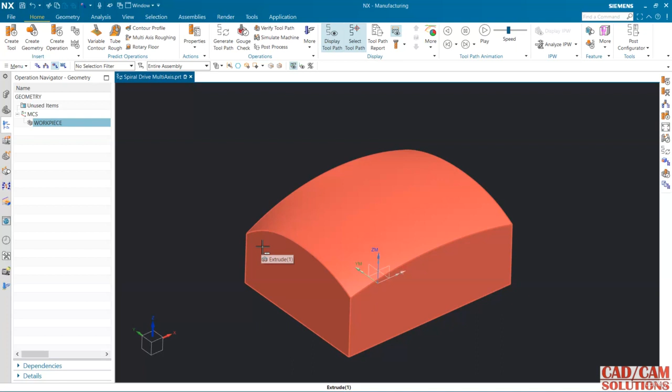Hello friends, in this lecture we will see a radial drive method in variable contour. We have already seen this in 3 axis, so this time we will work for multi-axis.

This is my geometry, so first of all define this geometry. This is the part and my blank is 0.2 offset from the part. Now tool, I'm using a ball mill tool.

Change the values as per the requirement.

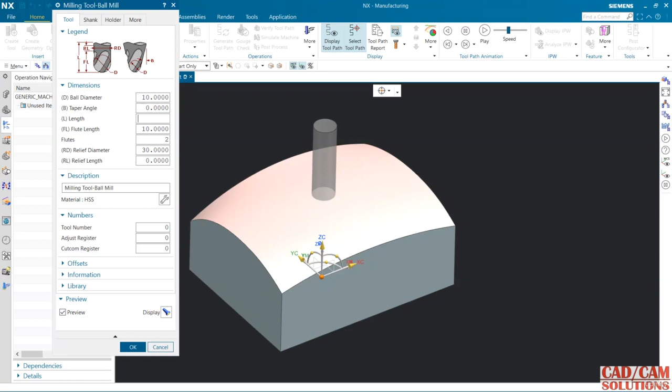I click here and I'm going to select this variable contour, and in drive I will change from surface to radial cut.

Now define drive geometry, and my drive geometry is this temporary boundary. Zigzag is my cut, step over is 1, and band is 10 on material side, and opposite side it is 5.

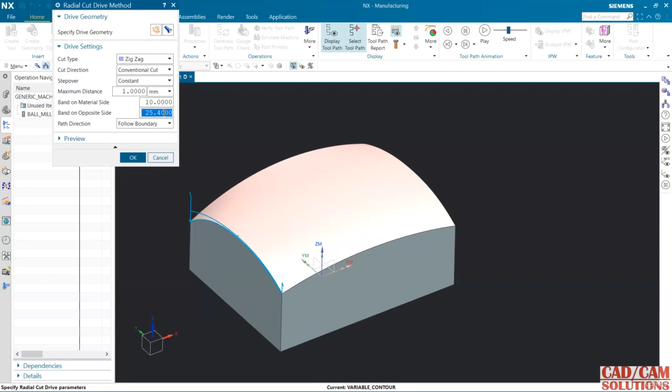I will show you preview, it is not showing you.

Now select area to cut. I want to cut this area, so select it.

And my vector is normal drive. Generate, it is not generating.

So go to this, and my projection vector is specify vector, and this is my vector. Generate it again and see, it is coming here only.

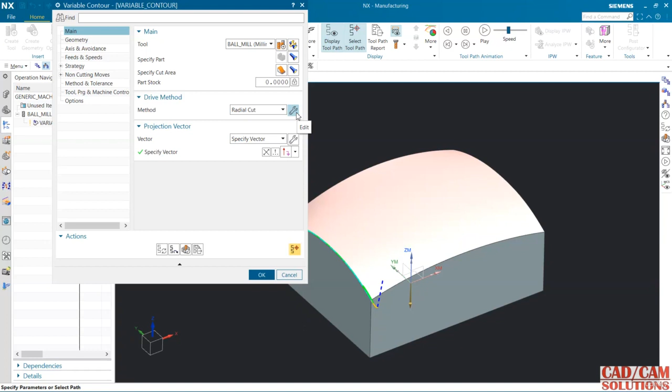So go to this radial cut, and from drive geometry my plane is automatic, and I want to define my plane.

So this time my plane is at 43, meaning above the selected surface.

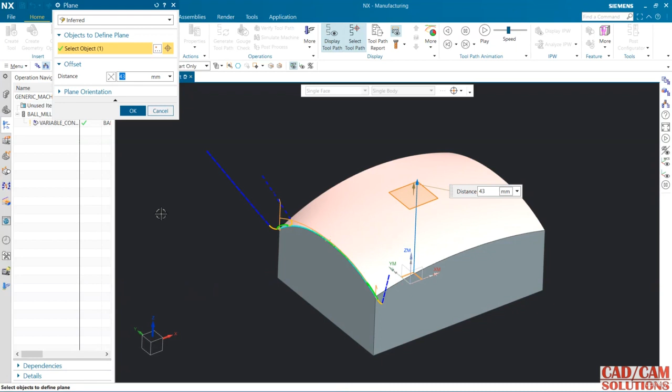Now boundary is here, and follow boundary, and let's see.

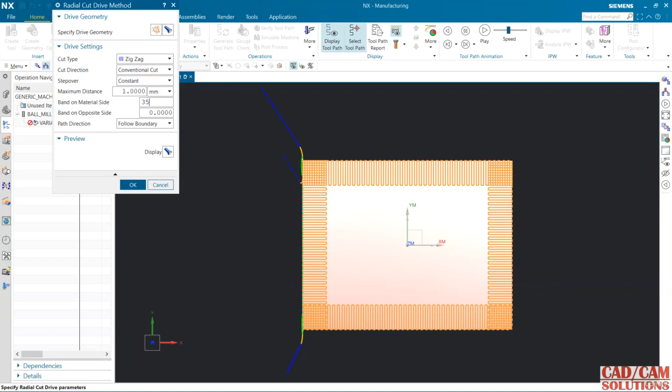5 outside, so 0, and see inside 35. See, okay, if it is.

Now I want to use this, so it is going to create like this.

And generate, and let's see the preview.

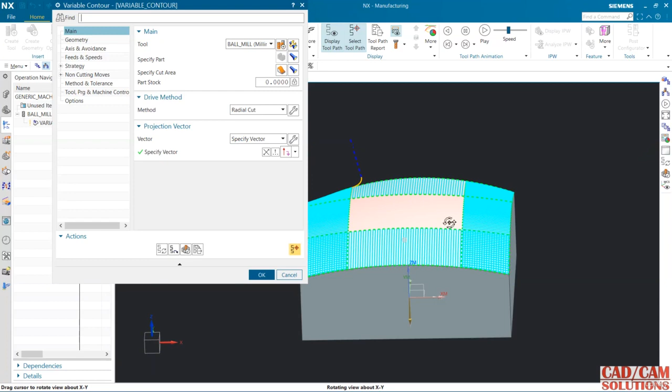It is working in multi-axis. Stop, and in 3D dynamic.

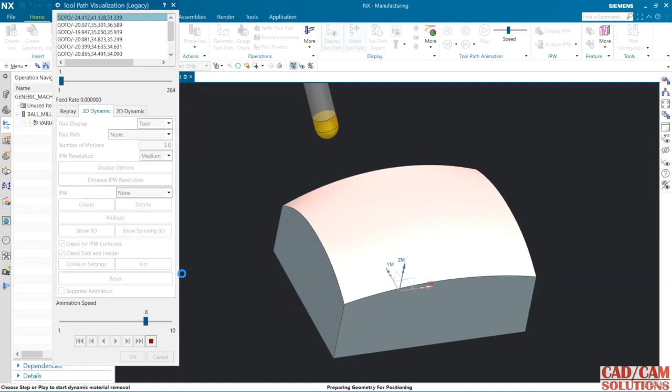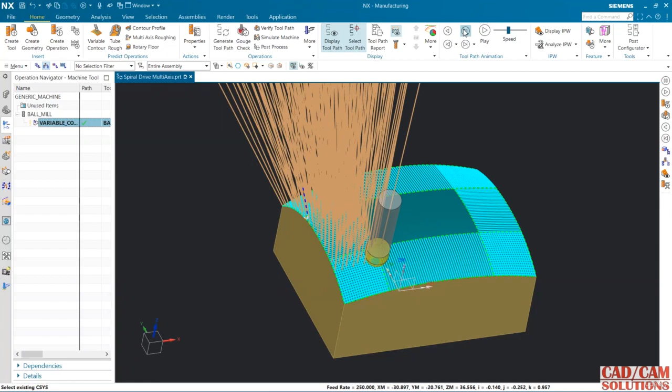Okay, just click, and I can trace the line, tool line. See.

This tool axis is not in Z direction only, it is in multi direction.